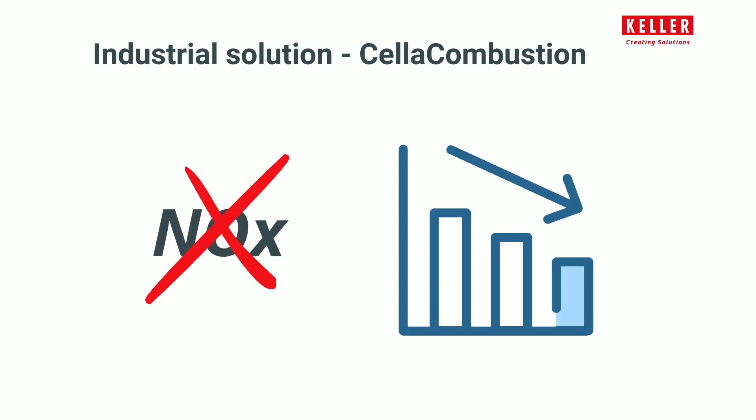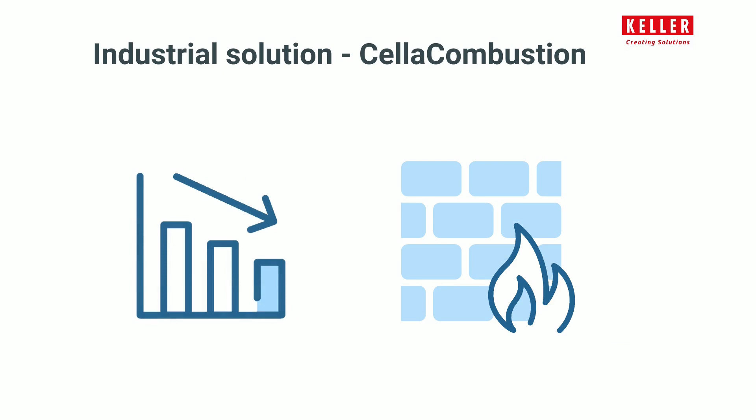Within the framework of legal regulations and approval requirements, the limit values for NOx emissions are being reduced further and further. In addition, the pressure on operators of thermal incineration plants to reduce operating costs is increasing. At the same time, efforts are being made to increase the efficiency of the boiler and minimize wear on the furnace walls.

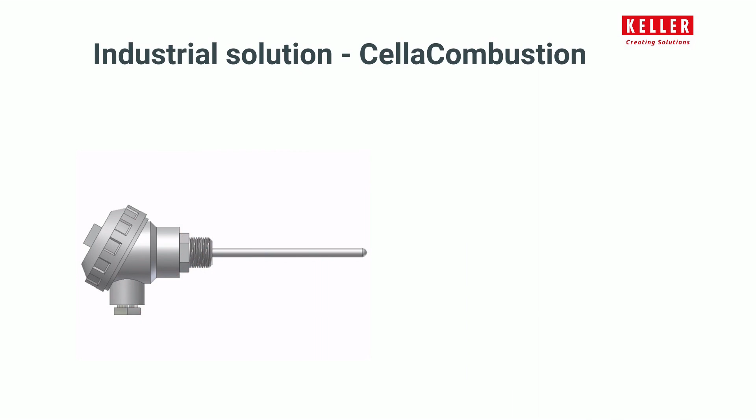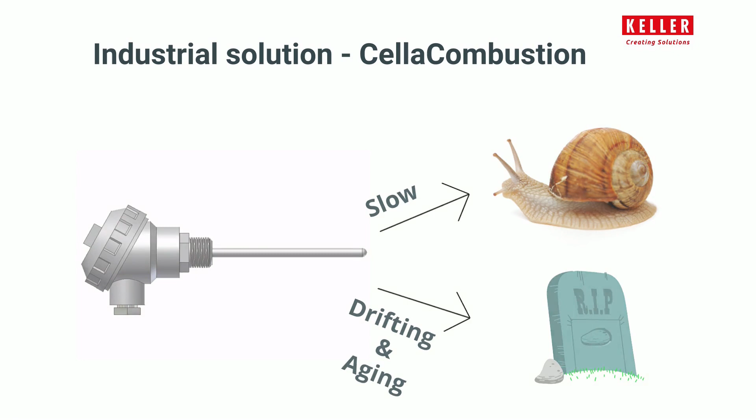The correct reading of the temperature in the furnace plays a decisive role in the optimization possibilities. Thermocouples are measuring the temperature in the area close to the wall. However, this does not correspond to the internal temperature in the boiler, especially if the walls are equipped with heat exchangers. The inertia of thermocouples leads to large fluctuations in the process control. Thermocouples also have the physical problem of aging and slowly increasing measurement uncertainty. As a result, thermocouples must be replaced regularly, leading to permanent consumption costs.

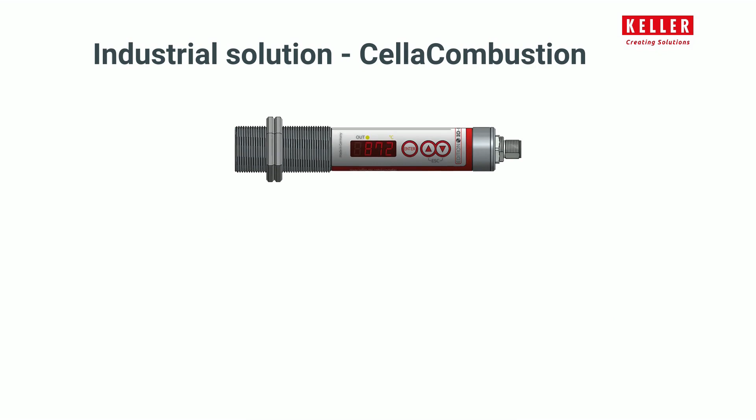The smart alternative for this measurement task is the use of an infrared pyrometer, which records temperatures more quickly, has a longer service life and is therefore more cost-effective and eco-friendly. The complexity of the combustion process requires the selection of a suitable pyrometer. Depending on the measurement location, Keller ITS can offer the appropriate solution, which differs in spectral sensitivity and measurement method.

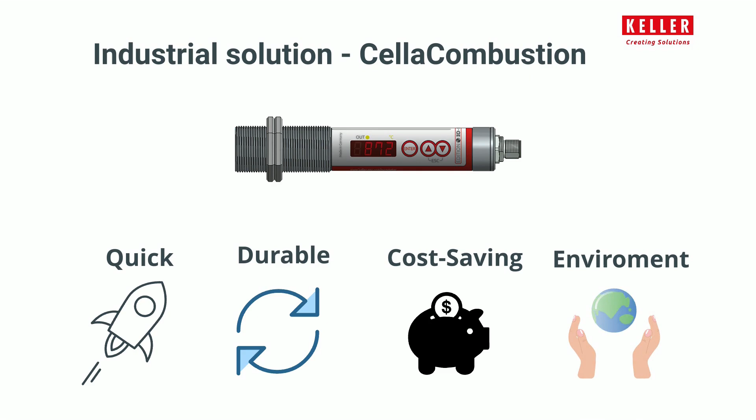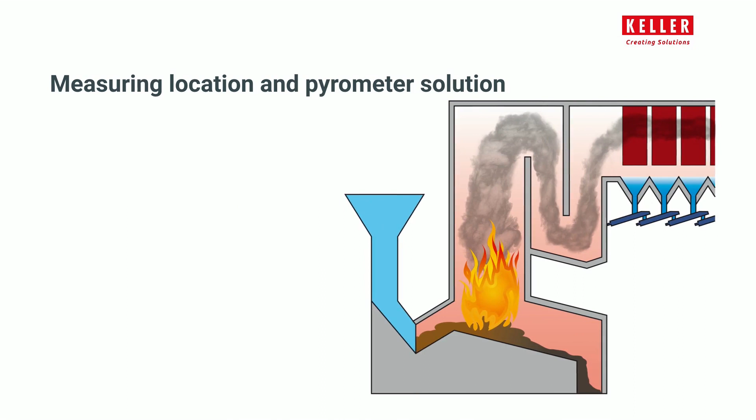Let's take a look at the common measuring points one by one. The first measuring location refers to the measurement of the fire bed. The second is the measurement of the sooting flame. The measurement of the hot flue gas is carried out at the third and fourth measuring location in the boiler.

This can optionally be done with low or high viewing depth of the pyrometer. The fifth measuring point is often a decisive measuring point for the detection of pollutant emissions after the main combustion zone, and at the sixth measuring point, the heat exchangers are monitored.

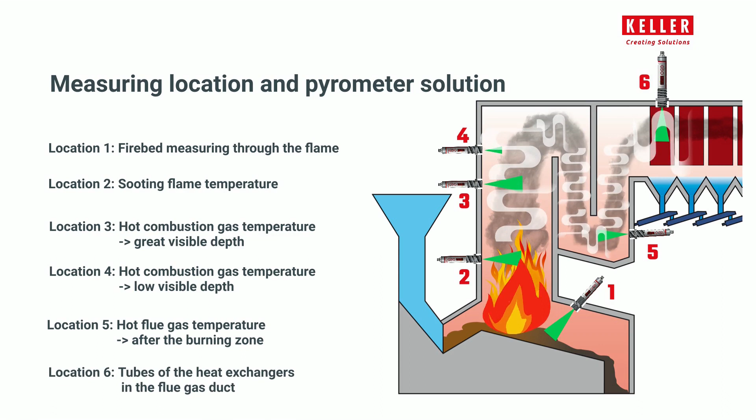There are further possibilities for using the pyrometer to optimize the furnace. For example, to obtain a two-dimensional picture of the symmetry of the temperature distribution in the furnace chamber. Optimizations for the air supply or the ammonia injection, among other things, can be derived from this. In this case, please contact us directly to show you the possibilities for your individual requirements.

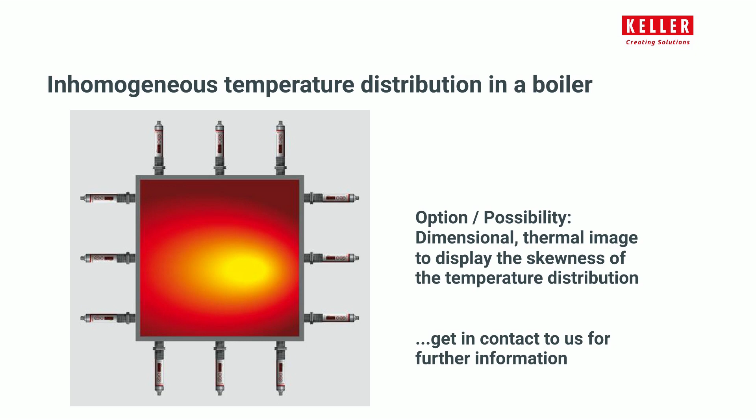Let's summarize again why it is so important to measure the temperature along the combustion process and what problems and optimization gaps arise if no measurement is taken. Fluctuating, too low or too high temperatures cause negative effects inside the combustion chamber. This results in significant fouling or premature wear of the refractory lining.

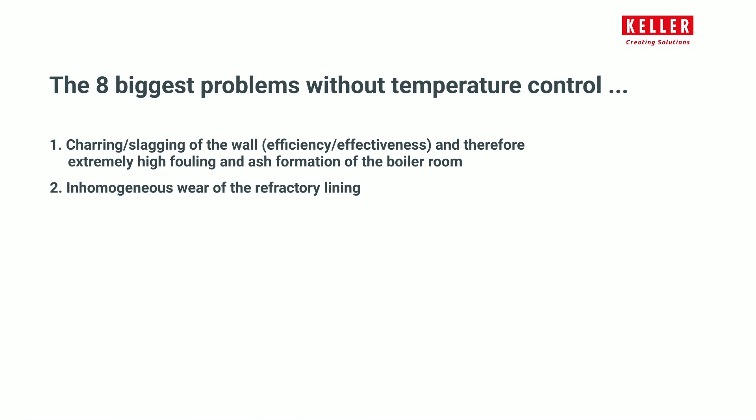The NOx concentration is too high, which however is usually under legal minimum requirements. The charging of the grate is random and cannot be optimized. The heat exchangers work inefficiently due to heavy fouling and wear out faster. Inhomogeneous burnouts can occur within the furnace. There is high dust ingress in the flue gas, and the timing of online cleaning cannot be determined. These are all clear indications that optical temperature measurement is an important progressive gain for your combustion process.

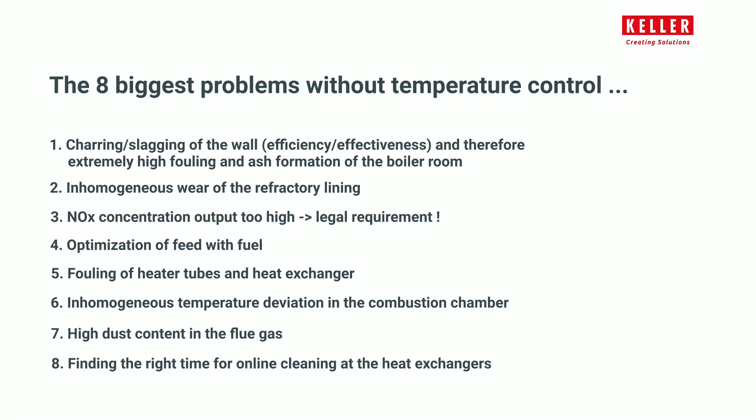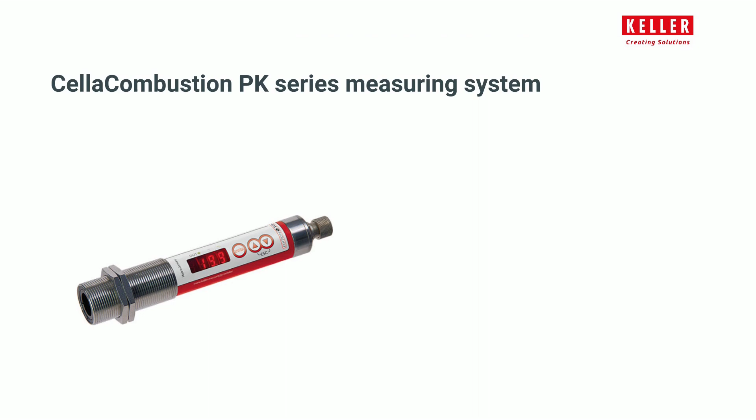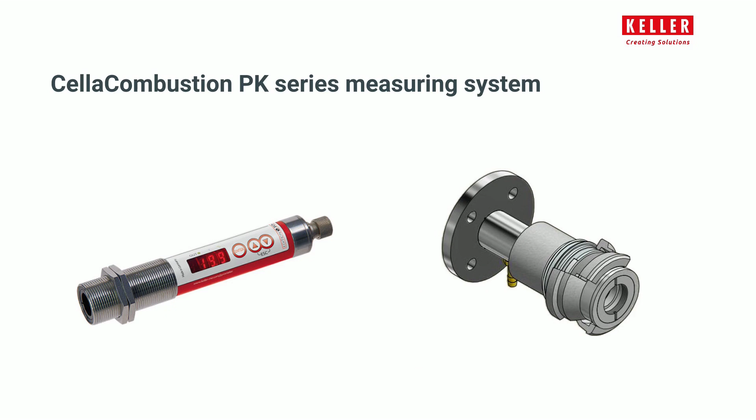Let's see what mounting and protection accessories are recommended for industrial use of the measurement system. First, of course, it includes the appropriate pyrometer. In addition, all systems consist of a standardized flange as well as an air purge to protect against heat and dirt. User-friendly is the included bayonet coupling, which allows easy exchange of the devices or changing of the included protection window without having to interfere with or interrupt the process.

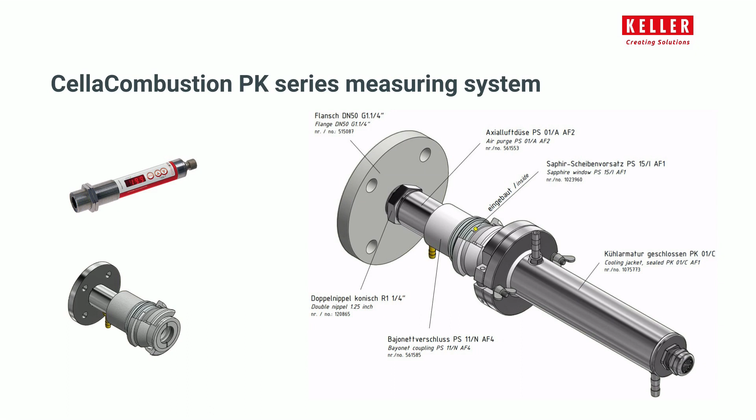Maintenance made easy. And if you need a cooling or protective housing, we can of course also supply this in the appropriate variant or retrofit it if required.

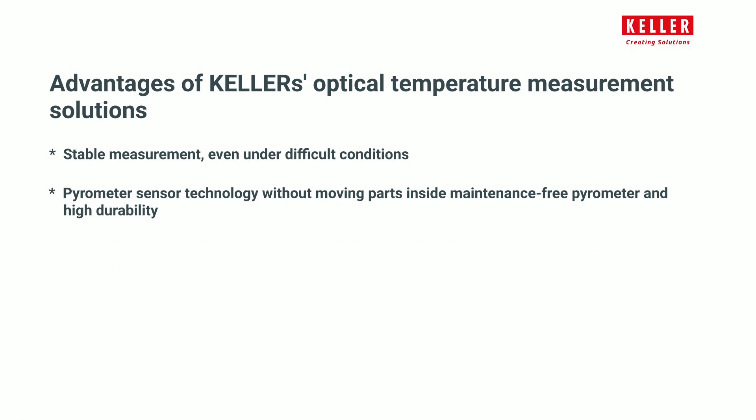But what are the advantages and USPs of Keller devices? Well, first of all, Keller devices provide a stable measurement signal even under adverse conditions. In addition, no moving parts are installed, which makes them maintenance-free and results in higher durability. Thanks to the IO-Link, various diagnostic data can be determined or parameters can be set via the PLC.

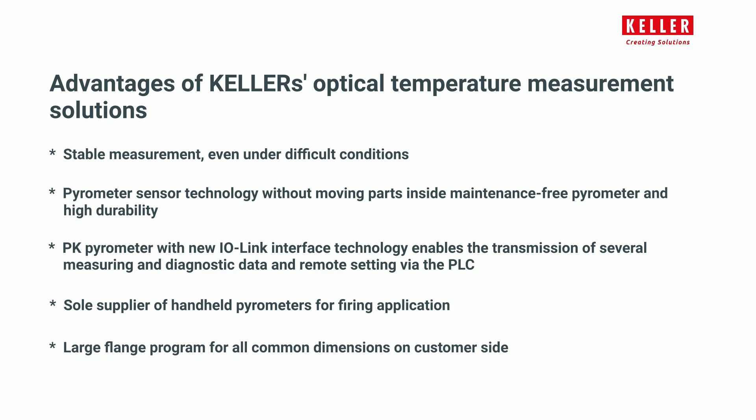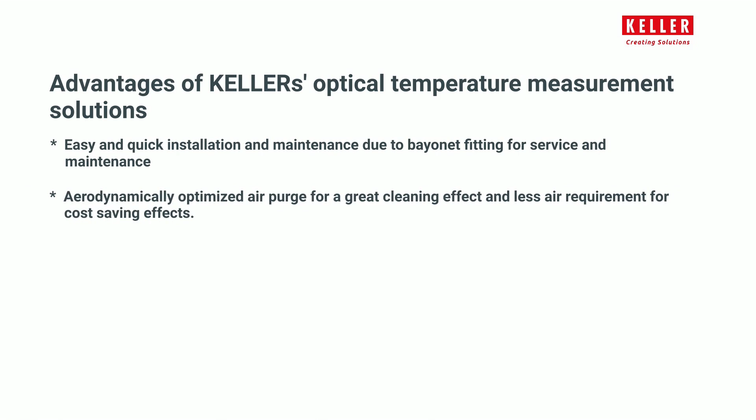We are the only supplier of portable pyrometers for incinerators and have a wide range of flanges for customers' adaptation to our system. But the most important reason for choosing Keller pyrometers is the fast and easy to use system due to the bayonet coupling for fast maintenance and the optimized air purge for considerably less air requirement and thus lower operating costs.

Not to forget, of course, the price structure. Keller systems are available for much less than other optical or acoustical measurement solutions.